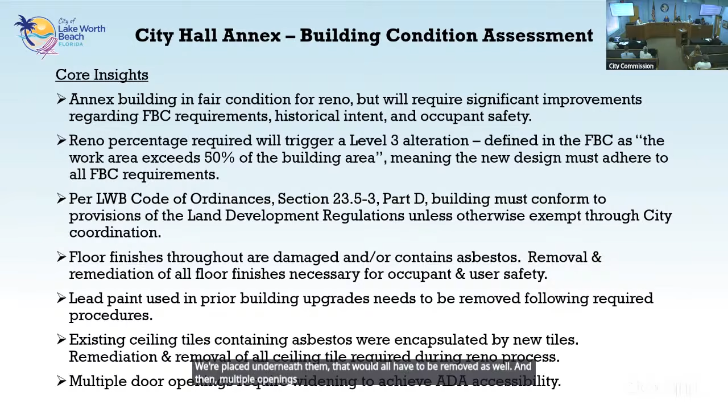And then multiple openings would have to be addressed as far as the width for ADA accessibility. The HVAC system units are kind of scattered throughout; we would need a single centralized HVAC system utilized. Restrooms need upgrades for current ADA compliance, meaning at least 2 of those would have to increase in size and square footage. Per the code, a small elevator or stair lift would be needed for ADA access to the 2nd floor, and that would have to be included with any kind of renovation. Depending on what type of future programming would be used, that would determine what type of fire separation would be required.

Can I ask you a quick question? When you say stair lift, do you mean the chair that goes up for someone in a wheelchair? To adhere to code, that's an option.

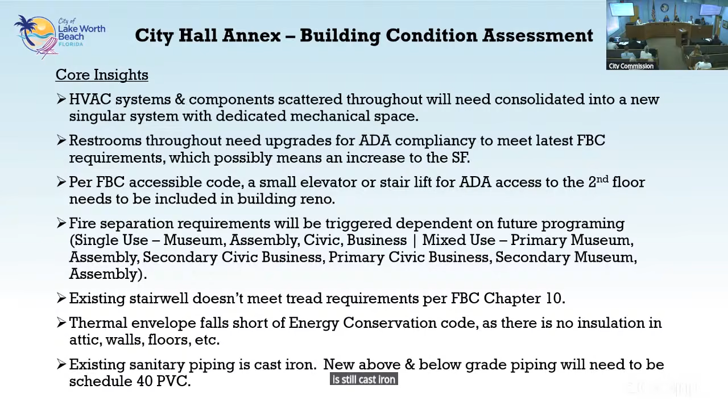The existing stairwell's tread requirements don't meet current Florida Building Code per Chapter 10. Our envelope has no insulation between anything, floors or walls, so obviously there's an issue with the thermal envelope. The existing sanitary system is still cast iron; that would all have to be updated to Schedule 40 PVC. And there's no fire protection noted, we don't have a sprinkler system, but as of a couple years ago we do have smoke alarms, added and monitored. So we do have that in the building, but no sprinkler system.

All of the distribution panels would need to be upgraded to 3-phase. There is currently no generator on site. The structural framing connection doesn't meet current wind loads per current Florida Building Code. The framing is under-designed and does not have capacity to resist the existing gravity and wind loads. Compliance with current code will require strengthening the foundation, floor framing, and the CMU wall. What we're currently doing is, you guys have already approved the roof trusses and the roof itself.

That is currently underway, and they'll get going with the actual roof truss work in the next 2 weeks. Once that's done, the roof work will immediately start after that. And that was based on the fact that no matter what the future of this facility is, we were going to have to address the roof regardless. So we want to at least get that done. And then this is basically to discuss what you guys feel could be a possibility moving forward.

I did want to have William address the zoning letter that was attached as well, so you guys can have an idea of what can and can't be done as part of this property. William Waters, Community Sustainability Director.

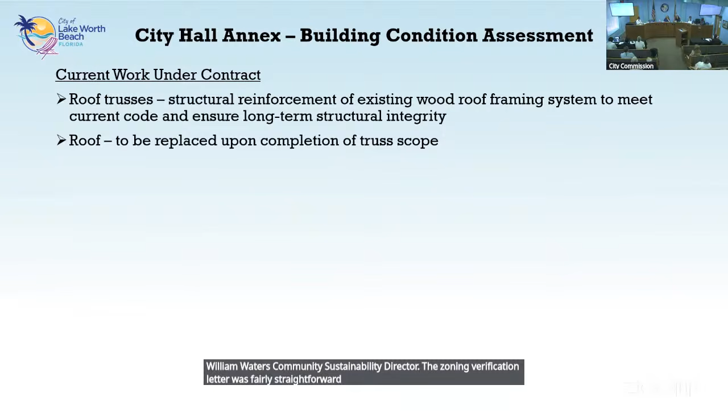The zoning verification letter was fairly straightforward. The future land use of the property is P. The current zoning is also P. The letter provided what the allowable uses are in the P district, which almost all of them are conditional land uses, which do have to go before the Historic Resource Preservation Board.

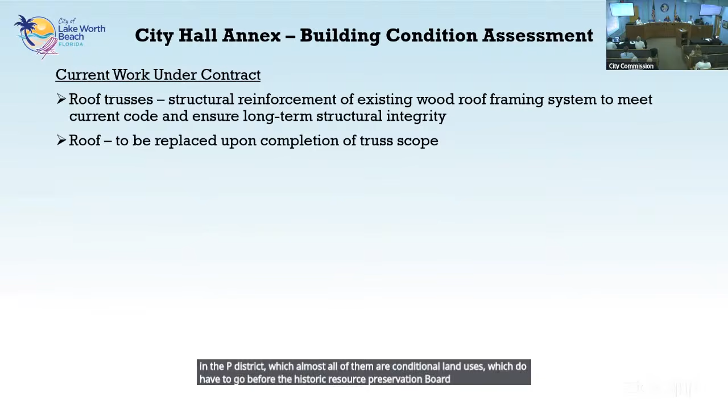The process to expand that list of permitted uses could take two paths. One is expanding the permitted uses in the P district itself, which would apply to all P properties, including the one we're in right now. Or it could be— Mr. Waters, Ms. May has her light on, as does Mr. Perry. Would you be a little slower, a little clearer? And when you say P for everybody, can you just explain what that means? Less acronyms, more fifth grade.

P means public. Thank you. And it's the same thing for future land use as well as the zoning district. And what does that mean though? Public. Well, that's public related. City hall is public, the library is public, the city hall annex is public. Most properties that are of a use other than public recreation, open space that the city owns and utilizes are designated as P. Okay, thank you.

So the two avenues to change uses or add additional uses would be: one, changing the permitted use table for the public district, which would apply to all properties that are zoned public, or possibly change the future land use and the zoning of the city hall annex to something like downtown, which has a whole wide variety of uses that would require probably a year-long process to change the future land use and then change the zoning to downtown. There is a significant difference in what is allowed in terms of building lot coverage, impermeable surface lot coverage, height, and those types of things between the public district and the downtown district.

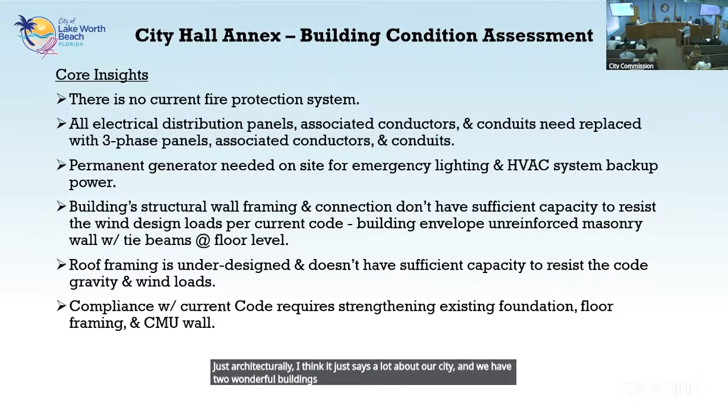Turn your mic on. Okay, Lori Whitkin, North Lakeside Drive. Okay, I find myself agreeing with the mayor on this. I've always loved that building. Just architecturally, I think it says a lot about our city, how we have two wonderful buildings at either end of our downtown, and I think it should stay a public place and be for our government.

The museum upstairs is just wonderful. I remember the museum when I came, and the one that was later created, what they did is magnificent. I think they've really captured a lot about our town, and I'm sorry it's not open even more hours. But I would really like to see that if we wanted people to come here. That's something, a museum, I think people would like to go to.

And architecturally, I just think we need to protect it. I think the city should do it. And I like the idea of having city offices in it. I used to like to go down there if I had to pay a utility bill, used to be able to get a parking decal without going crazy on your phone. So it'd be nice to bring that back. But I just think I'm sort of amazed at how much needs to be done.

It's 100 years old. Yeah, well, I guess it's time to do it all. But I mean, if we can afford it, I think we should find the money and do it, and keep it — all these offices, we shouldn't be paying rent for our departments someplace else if we own a building. That doesn't make sense financially. So if you look at what we don't have to pay to other landlords, I think we should keep it for our own.

And I don't think we should be renting it out for commercial purposes. I mean something like the Art League, to give them a space, that I can see. I think that would be a good idea, but it should be for those sorts of organizations and not for commercial purposes. Thank you very much. Thank you, Todd Townsend.

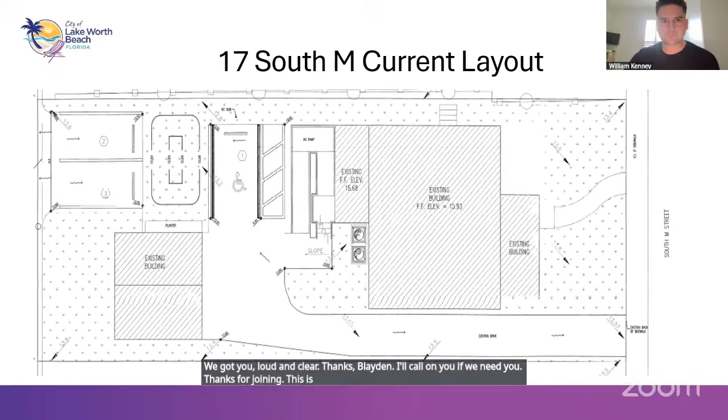They were a last minute addition to the backup. I do have one printed copy I can circulate. I'm sorry to interrupt, but can we get copies made, Mr. Perry, while he's going through this? Otherwise we're going to be lost. Can you go back to that slide?

Madam Mayor, before we get started, I want to say one thing: remember, this presentation is after the buildings move, and what we're going to do with it.

I had a couple questions, but okay, we've got some printed copies being made, should be here in the next few minutes. So I'll go ahead and continue on for the sake of time.

This is the current layout on the parcel where it is. There's actually two structures there. The garage doors face east currently — I want to point that out because in the new configuration, they'll be facing south. The larger structure is the hub for leisure services.

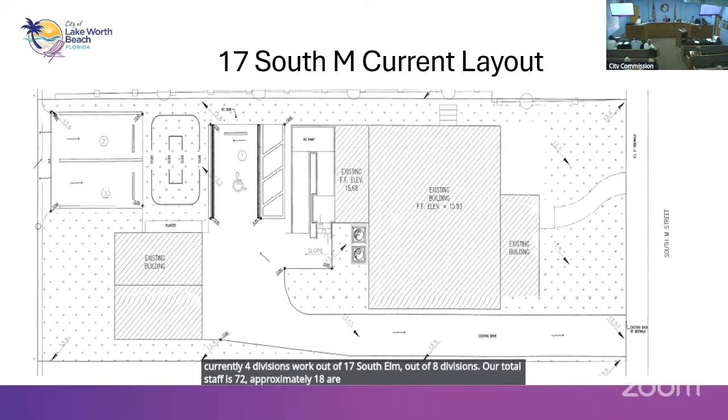Keep in mind when 501 housed parking, they were absorbed into 17 South M. So currently 4 divisions work out of 17 South M out of 8 divisions total. Our total staff is 72, approximately 18 are working out of that office.

The back side, the west side of the building, was modified for ADA so that if someone needed to come in, they would use the ramp in that parking space for the access aisle into that building.

Currently on the first floor there are 3 offices, a kitchen, and 1 bathroom. This is the main office that's the hub, the nucleus for parking. That large amount of staff, 10 right there, is pretty much the nucleus for parking.

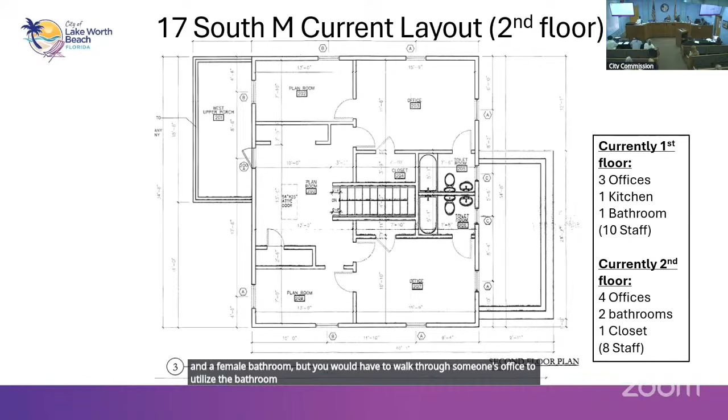The second floor has 4 offices and 2 bathrooms, a male and a female bathroom. But to use the bathroom, you would have to walk through someone's office. There's also a closet that was modified for staff to use as an office.

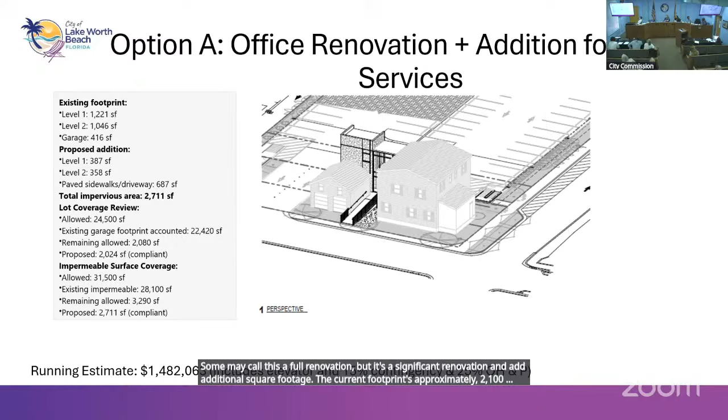Option A, some may call this a full renovation, but it's a significant renovation that adds some square footage. The current footprint is approximately 2,100 square feet, so this would add closer to 800 square feet of usable space.

The renderings here are from William Kinney, who's on virtually. He's got really 6 elements of design there. You can kind of see the price point. I know there's quite a sticker shock with 1.4 million — that's a full office renovation, and there are 6 areas addressed there.

We'll talk about meeting the intent or the letter of the law. So this would be more in line with the letter of the law. Any comments on that, William?

No, yeah, this would be a combination of letter and intent. Correct. William Kinney, anything? I heard you chime in. Oh no, I was just mentioning that. Could you speak up a little, sir? Oh, can you hear me? Okay, now better. Yeah, okay. Getting old. No, I was just mentioning that.

This is the full building renovation with added circulation from the first and second level by adding an elevator, and incorporating a full renovation for future staff with the existing conditions. So this is the full renovation, and we'll get into some of these renderings in the next couple slides.

This is First Avenue and K Street. K Street is to the far right, First Avenue to the left. The orientation of the building is how it sits now. However, the garage, which currently faces east, would be facing south for the roll-up doors. In the center of the renderings here, you can kind of see the ADA access.

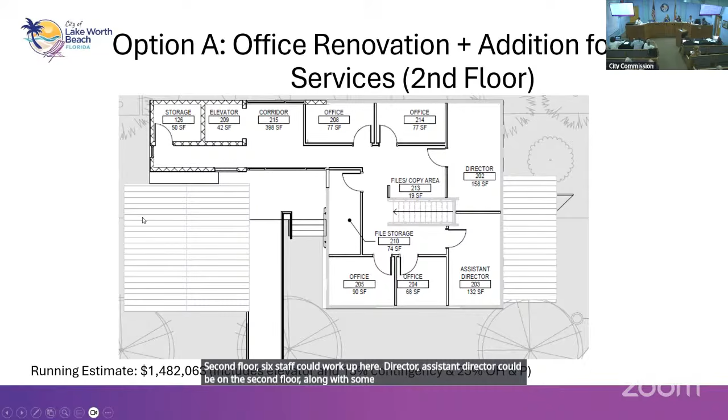So this first floor renovation would approximately allow 17 staff to work in there, but right now the current configuration allows about 10. The parking nucleus to that building would still be there, and then flex space for special events, PIO. Second floor, 6 staff could work up here. Director, assistant director could be on the second floor, along with some of the other managers from the 4 divisions that are currently housed in that footprint.

Option B is limited modifications, essentially the ADA ramp. Under option B, there are some modification options because currently most patrons of 17 M enter up the stairs off of South M Street. On this model here, with the limited renovations, we'd have to put it in between the 2 buildings, but could explore an option of it being off of K Street, for the ramp.

Now, both of these pricings include a 15% contingency, which is pretty much industry standard, and 25% for overhead and profit margin. So you can see the true price, or at least the running estimate of the probable cost, is approximately $120,031 for just the ramp and some basic site building elements.

William, anything on this? No, I have nothing to add for this slide. Ms. Malega has her light on.

Thank you, Stu. When I met with staff, and I believe William was there, and interim assistant city manager McKay was there, and Mr. Perry, my question was, if we don't choose option A, do we have space for our staff? And I was assured, yes, we do, because I know that you honed in on that on option A. So if we were to choose option B, which includes some staff, 10 employees, so it says for option B, the other employees do have a home to go to, from what I've been told. Is that still correct? Under option B?

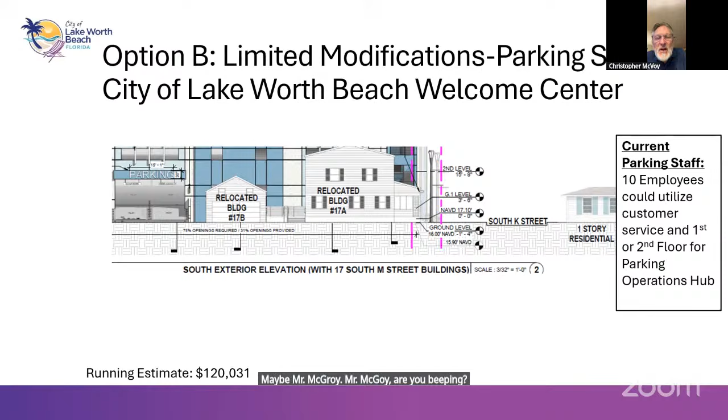Miss Malega has her light. Mr. Perry has his lighted. What's that? What was that beep? Maybe Mr. McVoy — no, are you beeping? No, no, I'm not. Oh, that was Miss Windage. I thought maybe he had a... Okay, just let us know he had. So... oh, all right.

Mr. Perry. Yes, Madam Mayor, just want to remind the commission of how we got to this point. As you recall, when we were going through our process, the Leisure Services Department met with the company and asked them to build out the worst case scenario — how much will we spend? And that's when they came up with the 1.4.

When we presented it and talked about it, we knew it was a lot of money, and we had other ideas, such as the utility director building a new building. We thought about maybe moving some of the staff out there. So there were some in-betweens. That's when staff said, we're just going to take a look at what it would take if we just moved the building and moved into it the way it is.

As we discussed the issue, certain elements came up and people said, hey, what about a welcome center? It was just thrown in as a concept, not by staff, but we said, you know what, that's a good idea, let's take a look at it. So when we brought this forward, we understand there might be additional costs, but we're not asking the commission to commit any dollars. What we're saying is, tell us the concept you would like to see. That's why we're here tonight — we're just asking, what concept would you like to see?

Well, and that's how the discussion came up. I appreciate that, but I think what concept we want to see is also, you know, what do I want to buy, how much do I have to spend — concept. So I'm trying to be a little more realistic.

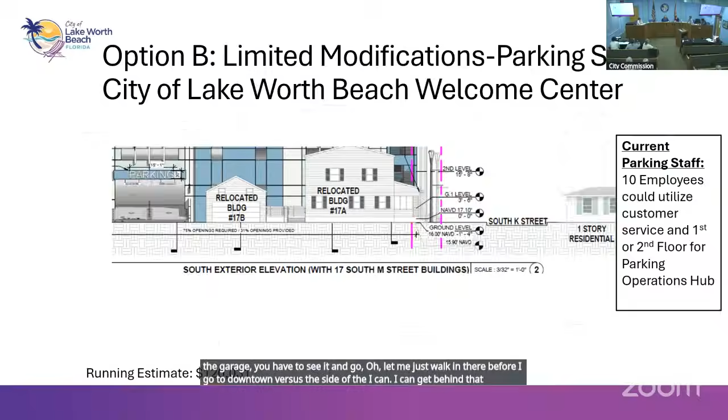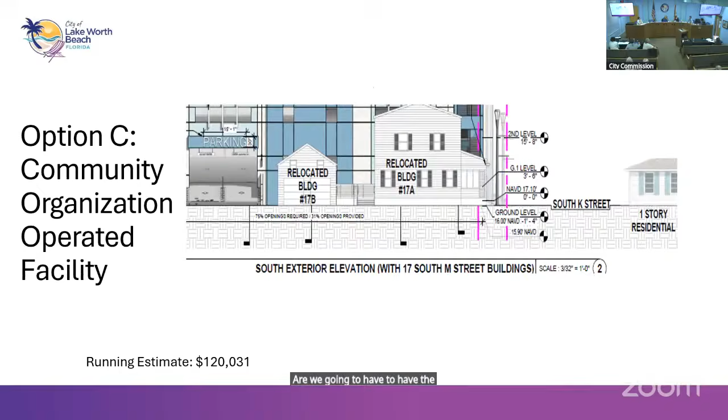Parking, I mean, people need to be able to pay their parking tickets, and it needs to be full service for them. Are we going to have the plexiglass windows, or is it going to be more of a desk experience?

The current layout was kind of in compliance with COVID protocols. Currently we have it because oftentimes folks come into the parking office with a hot temperature, so there is a physical barrier there between them and the customer service attendant. So it is recommended for that.

If we did the visitor center in the garage on the first floor, could we have room for maybe a PBSO duty office in there? A safety officer, or a park ranger.

I would like staff to come back with this, and I understand it's not going to be the $120,000. But I think if we're already doing it, it better be done right, because this is going to be one of the first buildings that anyone sees in our city.

I consent on all those things. You got my consent. Mr. McVoy, have you been listening, Mr. McVoy? I have indeed. I, to my knowledge, was not beeping.

It was something that occurred to me listening to a lot of the discussion of the visitor center, and people saying it sort of makes sense to put it at the garage, you park your car and you go to the visitor center.

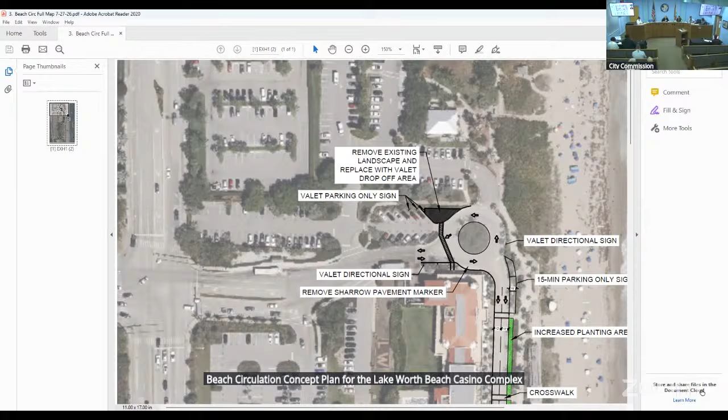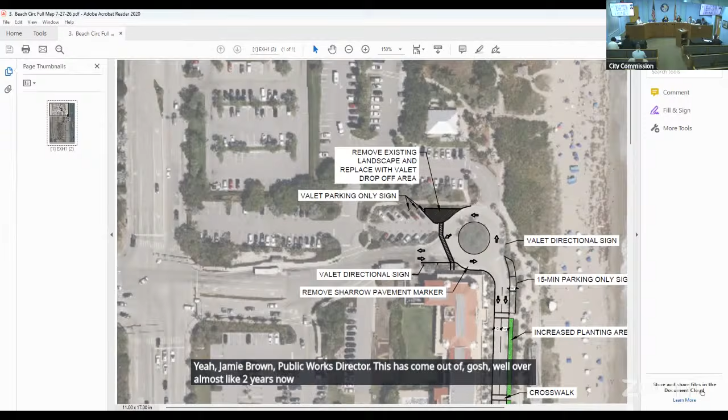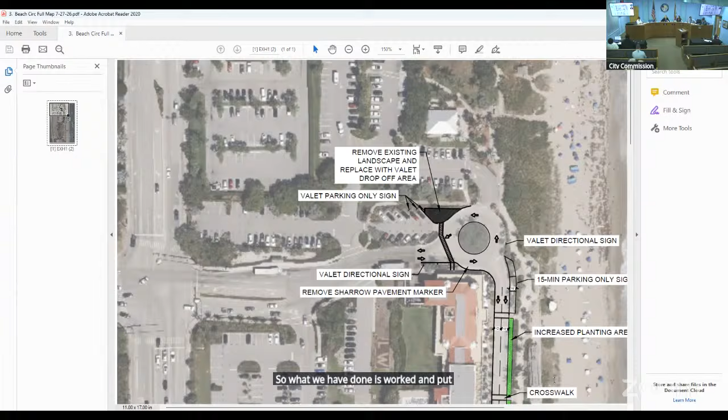I guess staff has a report for us. Jamie Brown, Public Works Director: this has come out of almost 2 years now of meetings with the tenants up at the beach and different things we've been dealing with nonstop. So we've worked and put together a concept for the beach to change the two-way traffic circulation to one-way southbound. I'll walk through the plan here.

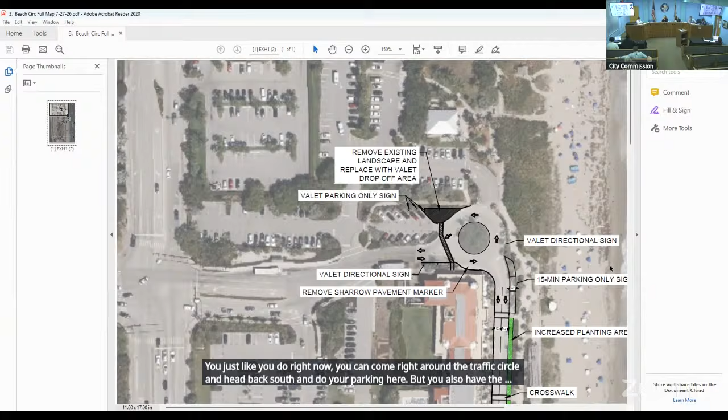So when you come across A1A heading eastbound, just like now, you can come around the traffic circle and head back south to do your parking here. But you also have the ability to go—you have 2 lanes heading south. This allows us to add an additional 11 parking spaces on the east side of these lanes: 3 at the north end of the casino and 3 at the south, the ones with the dark hatching here.

We looked at possibly doing temporary 15-minute parking, which would address some concerns up there—delivery services and things that weren't around when this was laid out well over 2 decades ago. So for people who want to do Uber Eats or grab a couple slices of pizza, instead of parking way down at the bottom and walking all the way up, this addresses that, and it also allows us to increase landscaping along this area.

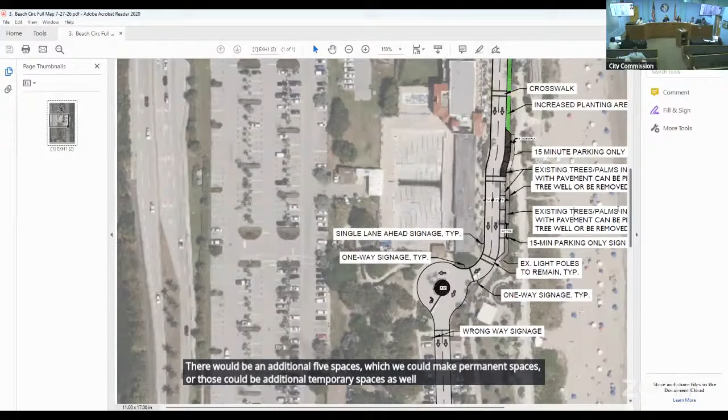And then, moving further south here, there would be an additional 5 spaces, which could be made permanent, or could be additional temporary spaces as well. Continuing on, we still have the roundabout there, and everything else is basically the same except for the traffic pattern. You'd have a merge and no entry, so no one would be able to come in from the south entrance of the casino building.

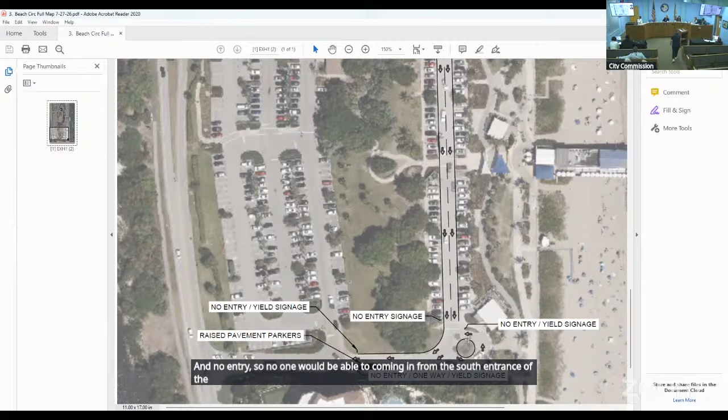You wouldn't be able to come right up this way, you'd have to go through the parking lot. But this also addresses some of the issues with fire safety. Stu and I were talking right before this—some of the events over the weekend up at the beach had a lot of stacking and issues, was it fire?

Come on up, man, you're right back there. What were some of the issues you were just telling me about from the weekend? Stuart Sword, Leisure Services Director: I observed yesterday at the Benny's Beach cleanup a significant amount of traffic in the far east lot, the top lot, the upper lot.

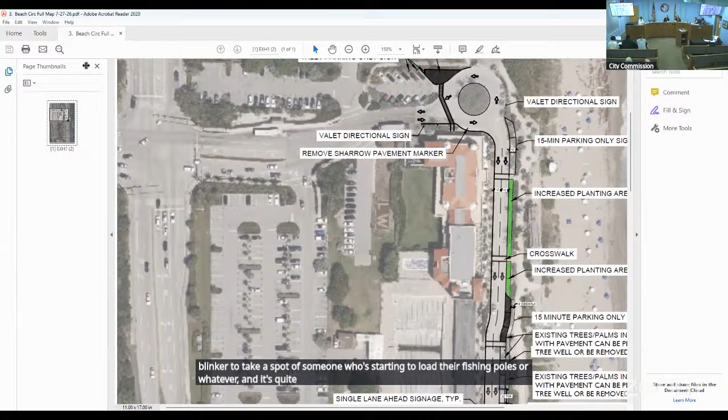What you'll see is folks will put on their blinker to take a spot of someone who's starting to load their fishing poles or whatever. And it's quite the production to unload the beach, so they're sitting there for 5 minutes, sometimes more, waiting to turn. So folks try to go around now counterflow into that lane, and it creates a bottleneck. Yesterday, fire rescue was circulating down there and had to blow their horn to clear out the bottleneck that's occurring because people are essentially blocking both lanes waiting for a spot to open up. So significant delays can occur up there during peak times.

So this is basically taking into account some of the stacking issues we're seeing, the traffic pattern issues we're seeing, fire rescue issues, tenant issues, and addressing some of their concerns that we've discussed in meetings with them, and just trying to modernize our traffic flow up there and modernize the beach to make for the best experience we possibly can.

But we wanted to bring this to all of you after having met with tenants and everything, to see what some potential ideas are, what you guys think of this, if you're in favor of something like this, if you would like to see something different, or if you don't like this at all. It's kind of a starting point to see where you want to go from here.

Have you spoken with police and fire about whether they're in agreement with this? Fire, yes. Police, we have not yet. So the fire department is okay with it.

Back when we spoke with them, again, this started a while ago - I believe Geraldine was still here back then, so it goes back quite a while. But again, with some of the issues we came up at the pre-agenda meeting, where you now have people parking illegally in the fire lane at the top there and trying to run across to get something real quick - that's a consistent issue that we deal with.

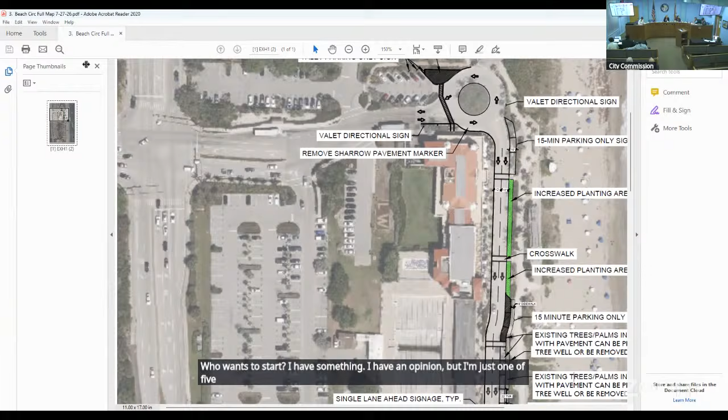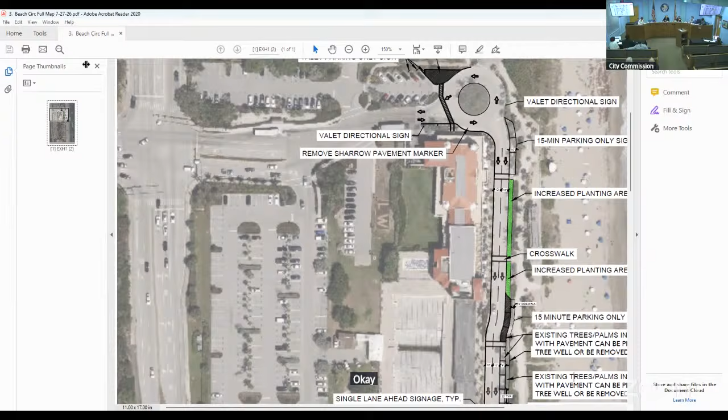Okay, I just have a question because you went over the 12 or 11 additional parking spots, but you didn't talk about the valet. Can you talk about that?

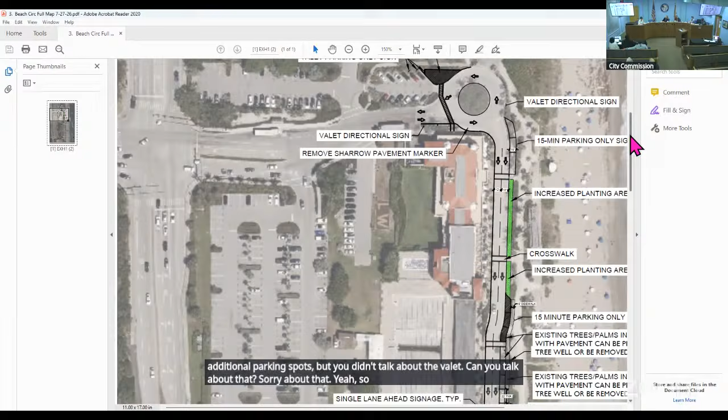I'm sorry about that. Yeah, so another one right here at the north end. That was one of the things that came up in speaking with some of the tenants. If we were going to address some of these issues up there, if this is something the city would be interested in doing in the future, it'd be something we would address right now, so at least we have the space for it.

Should that be something we want to do? Where you'd basically come up here, you would be able to stack at least one vehicle here in these first 2 spots. These resident parking spots would then shift to the bottom lot here.

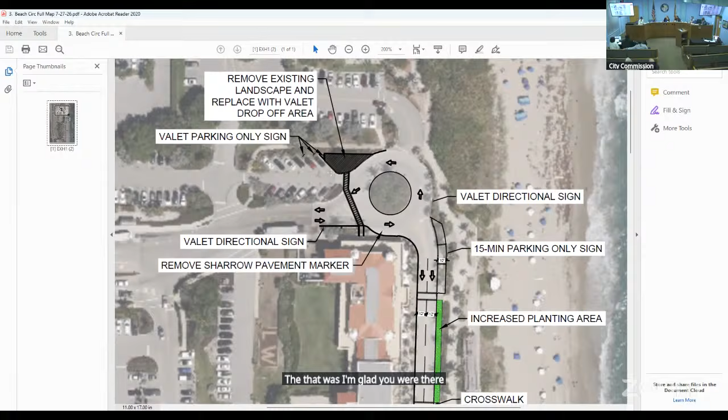Don't - that was, I'm glad you brought that up because that's my concern too. Taking away resident parking doesn't seem to be the direction that we're going in.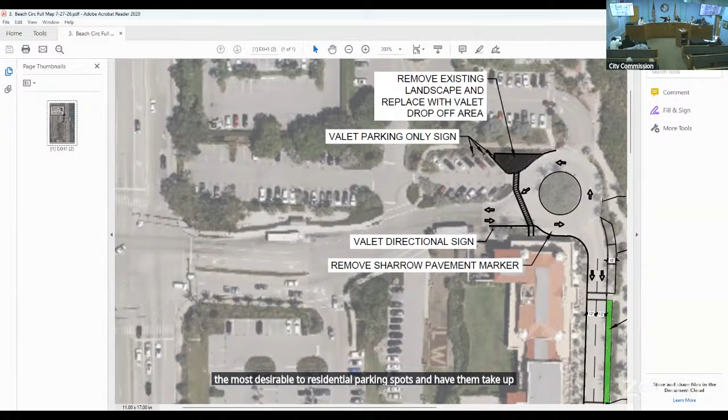Those 2 would just shift to the other resident parking spots we have down here. So you would make them the most desirable 2 residential parking spots and have them take up 2 of the 11 or 2 of the 13 spots you're talking about. Because the residential spots - that's the one thing about them - is they're convenient. There are some down on the lower level, but those are the premium spots. Let's not give them away to the valet. The valet parking would be in the bottom area down here. This would be 2 spots.

That's for the stacking, so that still takes away parking space. I understand, but there needs to be an area somewhere up here where someone can hand their keys off, and then they can take the vehicle and go park it in the spots designated for valet. Well, that's a very big concern.

My other question was about increased landscaping. I'm a little concerned because I go up there almost every day, and the sea grapes are so high now it's like going up to a wall. You don't see the ocean as much as you could. I don't know how much we can trim the sea grapes, but the thought of more vegetation - although I'm all pro-vegetation - are we going to block the view?

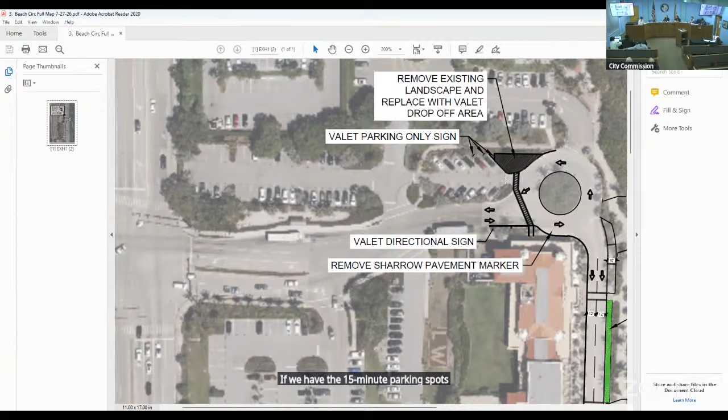One of the things is if we have the 15-minute parking spots, those of us who've been here a while used to just park and look at the ocean. It was here before, and this would allow us that again - now I have to illegally stay at the circle on top for 5 minutes if I want to rest.

So that would give people the opportunity to stop, either walk out or just look at the ocean. The preference would be, this would be one of those areas we would not recommend shade trees, but taller palms that would line the entire strip, nothing that would actually block the view from vehicles passing by, but that does give us that ability.

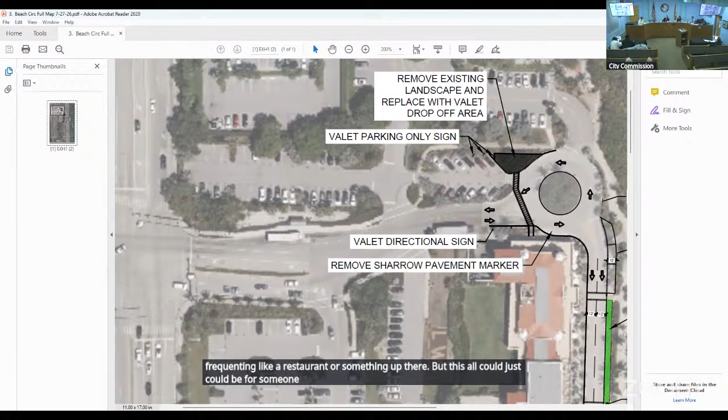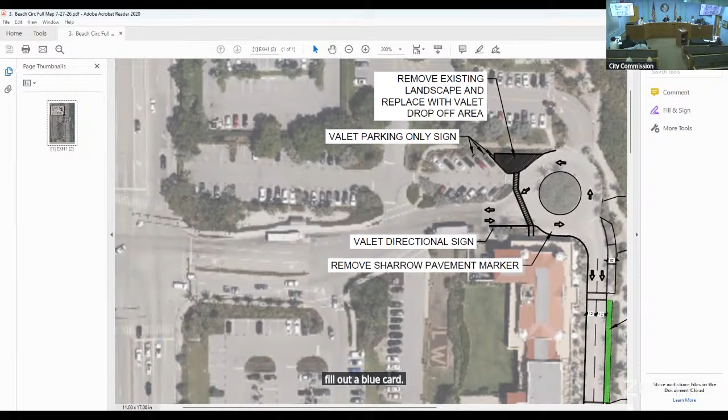As far as the valet, this wouldn't just be for someone frequenting a restaurant up there, but could also be for someone coming to the beach who doesn't want to deal with parking their car. They want to drive up, jump out with their cooler and chair, and fill out a blue card. Again, something that doesn't have to be done, but if we're going to address a lot of the concerns, valet parking is something we could look at.

Especially during turtle season, it's really dark for people to park at the bottom and walk up to the restaurants. I've had many comments from the owners up there saying it's hard. So again, just wanted to take into account everything we discussed with everyone and see if we could at least have an area for it.

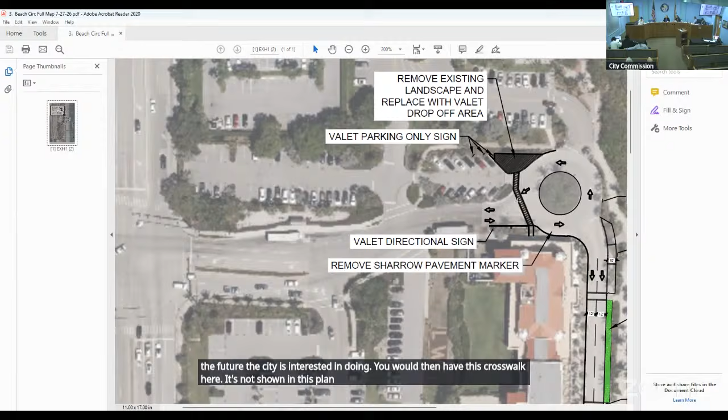If that's something the city is interested in doing in the future, you would then have this crosswalk here. It's not shown in this plan, but the thermoplastic striping triangle that separates the east and westbound lanes would actually be a raised median, so you'd have a pedestrian refuge there. There's a bad crossing there now, no pedestrian crossing up there at all, so we would have to address that as part of this overall plan.

I had one more comment. I noticed some comments saying we shouldn't do anything until we have this whole plan for the beach. Well, I want to be alive when we have a plan for the beach, but if I'm not, it doesn't matter - that will not affect the overall plan of the beach. The casino is there, the tenants are there, the ocean is there, the parking lot's there. That's not going to change. So that's my response to the idea that it's too early to do this. We could sit forever and do nothing.

Ms. Maliga - I was going to say to that point, Madam Mayor, there's been discussion of possibly doing a structure. This would not change the actual traffic flow or what we'd be looking to do here. We do have tenants who have been very loyal and up there for quite a while, and when they tell us things they'd like to see, it's nice to be able to address some of those at some point since they've been asking. I don't know the time frame for some of the things that may or may not happen up there, but we want to at least bring this forward so we can have the conversation and see where it goes.

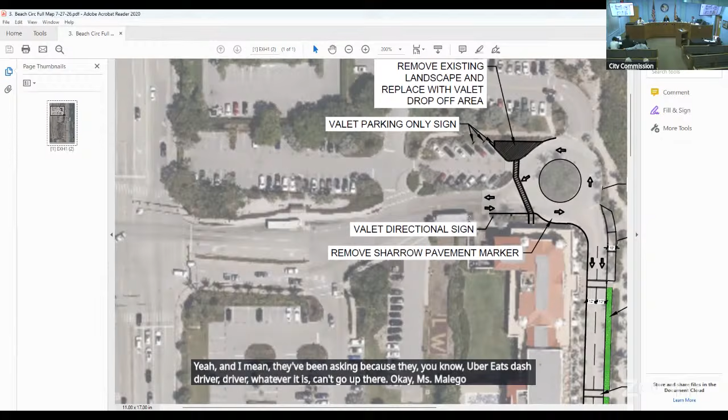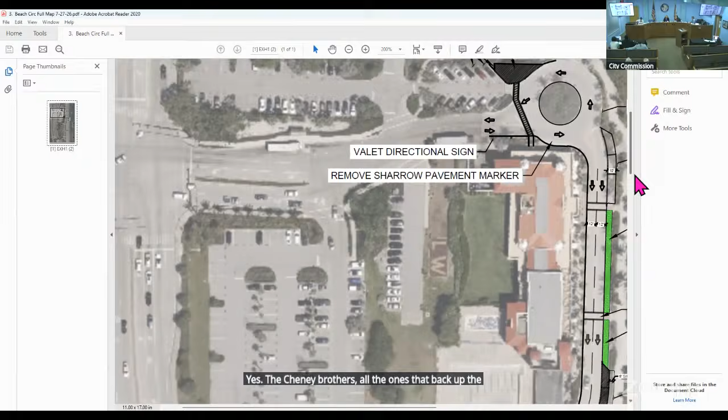They've been asking because Uber Eats, DoorDash, drivers, whatever it is, can't go up there. Where do the delivery trucks go? Can you go back to that? The Cheney Brothers trucks and others that back up the traffic - they park, I know where they park now.

This basically allows you a through lane. So when those vehicles are up there - some come early for deliveries before the beach gets crowded - but right now they basically block your northbound or southbound lane, and you end up sitting behind them waiting for traffic to clear so you can go around, but it still stacks up traffic behind them. This essentially gives you a through lane, so when that's happening you have the ability to go around them.

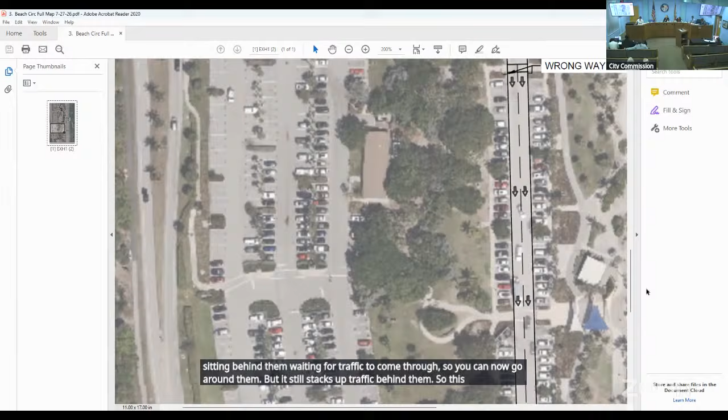Well, would it not be prudent for us to make a delivery designated area?

If we're going to be doing this, I'm one of the ones who's not in favor of doing this until we know what we're doing at the beach, because we just had 9 people tour the casino building and nobody gave us an offer to do anything because of the eyesore of the pool. So to me, I'm spending good money before I even know what bad money I have to spend to make this.

And the people have spoken. They don't want us to do a triple P. So yes, I agree we have to do something, especially for the tenants that are there. But I know the biggest concern is when the delivery trucks are there, and I think it would be prudent for us to make a designated delivery spot in between the main tenants, the main building, and Benny's.

I also would like to know if we're going to have valet, are we going to offer residents a discount? Because if we're having valet and residents choose to use it, there's not that many residential spots, even for those of us who have decals. I think if we're going to offer valet, it would be nice to give residents a discount if they're Lake Worth Beach local, if they choose to use valet. I know for ADA compliance, people schlepping 5 kids and all their stuff going to the beach for hours, valet is a great option.

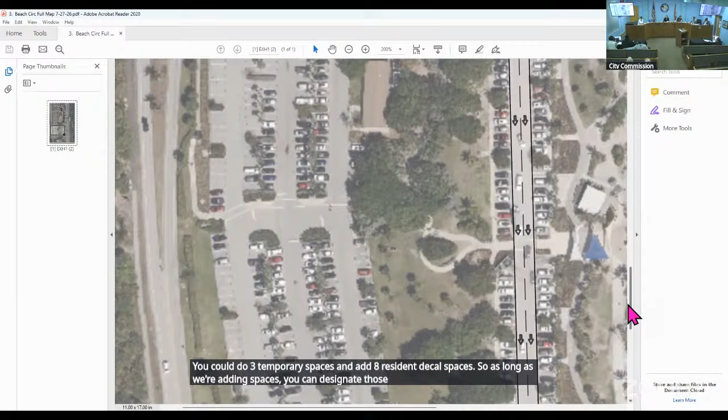Any space we add, though, we still are meeting that minimum requirement. So technically all 11 of these spaces could become - if we didn't want to do any temporary spaces at all, you could have 6 temporary spaces and add 5 more resident decal spaces at the top. You could do 3 temporary spaces and add 8 resident decal spaces. So as long as we're adding spaces, you can designate those as residential because we're still meeting our minimum requirement as far as what the county required for.

It needs to be open to everyone in the county, not just Lake Worth Beach. I appreciate that.

I just, like I said, I'm still concerned about the delivery trucks that are up there. Because if you have 1 or 2 at the same time, and then you've got the Uber Eats guy, I understand the congestion because I've been up there and I've seen people double, triple parked when they're not supposed to be, where it says no parking and people pull over and park anyway. I do believe the conversation has to be had. I just think we're putting the cart way before the horse right now. And we did run some models on different areas we could possibly do that.

What came back was basically the amount of time that you have delivery trucks up there. The benefit would be to have those be actual spaces rather than just for the temporary times the delivery truck is there, because they take up basically 3 spaces. And if it was one, but they were both one way, you could still get it to be less of a traffic jam. That was the way to address that without having a designated area.

Well, what about making a delivery truck little area, circle the delivery truck, which is where I usually see the parking people parked with their hazard lights on. Some of these trucks don't make the radius. Because when you're on the simulation, it's like a 14 vehicle - Cheney Brothers won't. Yeah, there's a certain vehicle you have to run through the simulation to make sure it makes the radius, and that does not work. Okay, so we did look at all that.

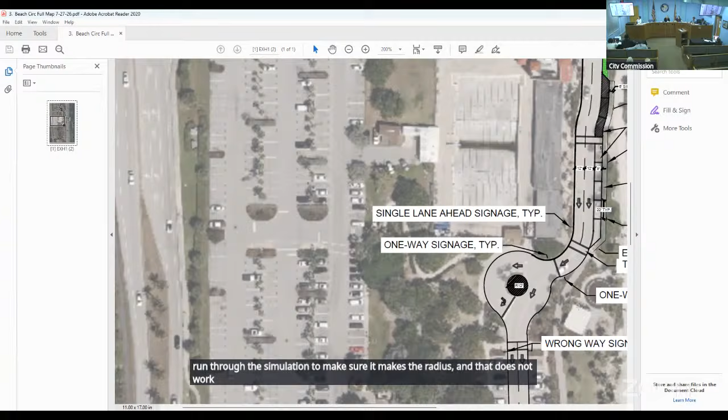Vice Mayor May: Thank you. I definitely am not for taking away any of the parking spaces up there for valet. I also agree with Commissioner Malega. I know you spent a lot of time on this and talked to the tenants, and I know there is a problem you are trying to solve. I get that, but I don't see this as the solution.

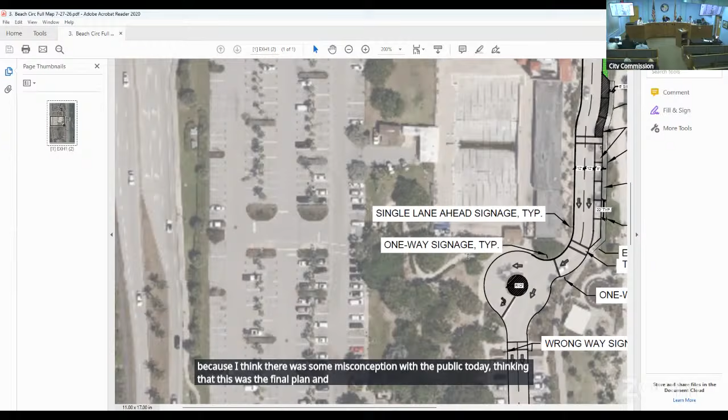I appreciate you saying that, because I think there was some misconception with the public today, thinking this was the final plan and the commission was trying to bamboozle them. I made sure I put 'concept' in the title, but which is not the case at all. I appreciate you clarifying that.

Absolutely, I think there's more conversations to be had. I don't think it's necessarily a bad idea. I do think we are going to have to do something regarding the Uber Eats type of thing. I think with the 11 spots, adding 15-minute parking in 11 spots, we can be more judicious with those spots. So I like the beginning, but I'm not sold on the final.

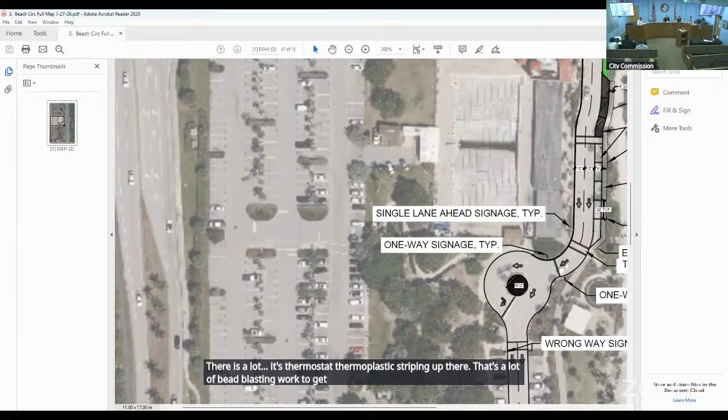Madam Mayor, if I could address the cost - there's a lot of thermoplastic striping up there. That's a lot of bead blasting work to get all that up before you put down new thermo. So you have to remove all the existing striping, that's tedious work. Then there's asphalt work, concrete work with all the new curbing, there's a landscaping portion. There's a lot to it. Do I think we can get it for well under that? Absolutely.

To be fair, I agree that if we're going to do it, we've got to do it right, with the thermal blast or whatever. But I've also driven down South First Avenue, and we can't even drive down that street. So we have drivable streets working great up there, and we have others where you may literally lose part of your car driving down. So it's not my priority, that's all I'm saying.

I'm like, get a bucket of paint and change the arrows. Oh, let's go to the high school kids. Right, get the high school kids.

Mr. Segridge, did we pay WGI for consulting on this, or did we just reuse their maps? A very minimal amount, because this was not an actual design plan, just basically utilizing existing survey work. Okay, so we did pay for some consulting? Yeah, we met them out on site to look at some different things.

And just for clarity for the public, how long have you been working on this? Like the concept, has it been around 3 years, 4 years, 2 years? It's about 2 years, but obviously we weren't working on that the whole time. We'd meet, come up with an idea, meet with tenants, then 5-6 months later meet again. It's not something that's been pressing because there's a lot of other stuff going on. But we finally got to a point now, so there hasn't been an extreme amount of staff time put into this.

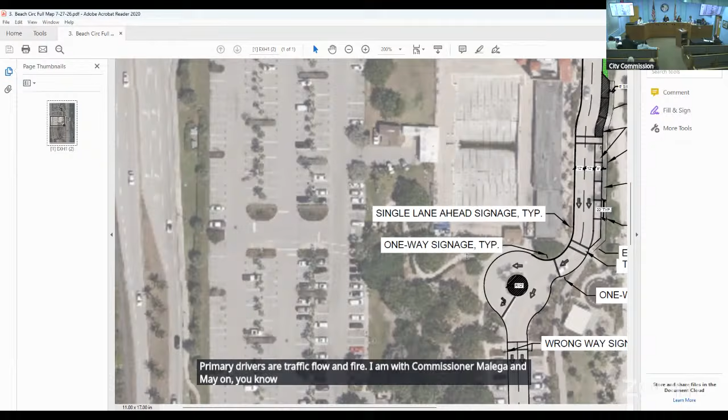There is so much wrong with what's going on at the beach that needs to be corrected. Looking at the overview here, pretty much 50% of that land is this big, dark gray, useless structure with our wonderful LW piece of wood chips sign that I hate.

Already been discussed. It's been addressed.

So I understand the delivery truck issue, that kind of makes perfect sense, right? If we have two different one-ways, there's a lot of traffic. I try to avoid going up to the top of that just because when you're driving through, people are trying to back into spaces and things like that. It's a mess. I just don't like dealing with it. This would alleviate a lot of that.

I wouldn't necessarily be opposed to just looking at purely changing the traffic pattern, doing nothing else other than saying instead of it being two one-ways, it would be unidirectional. And what's the minimum that we have to do to accomplish that?

I think addressing the Uber Eats issues and so on, there's a very select number of tenants, about one, where Uber Eats is probably an issue, or DoorDash and all of that. That's the pizza parlor. They do a lot of business, we order from them all the time.

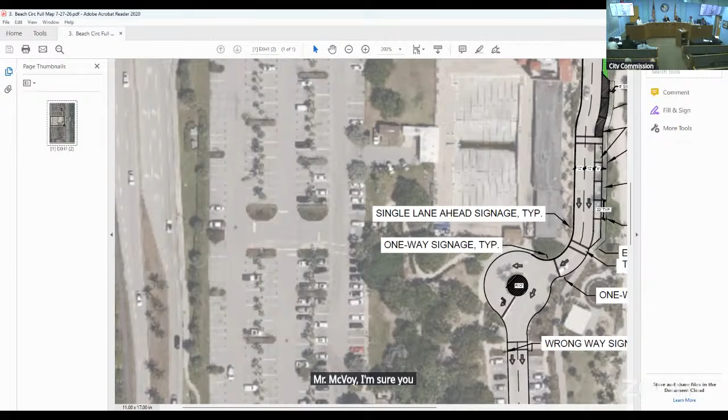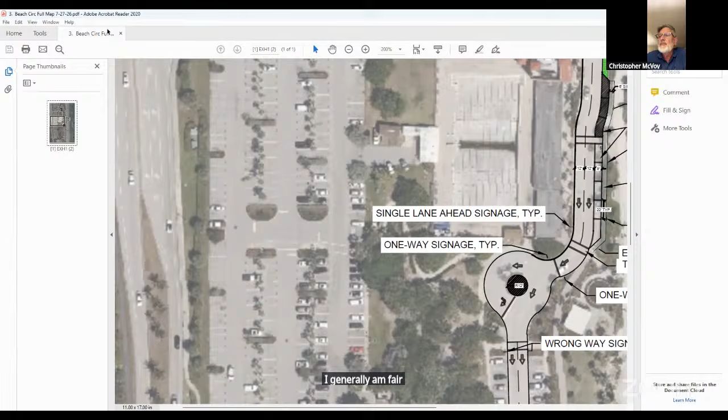Well, thank you. I generally am fairly similarly aligned to some of the other concerns that it doesn't seem like this is our biggest priority, either citywide or beachwide, if that's a term.

The concept of making it unidirectional southbound doesn't seem unreasonable to me. I'm not sure it would cure the problem discussed early on of people waiting for somebody to unload and get in and out of a parking space. Maybe it would help with that. Won't make it any worse, and it might accommodate the delivery trucks. So the unidirectional, I could go along with.

I don't know that I see it as the biggest priority. I do understand you can't just paint when you've got to do directional painting. It's special paint and it's on really tight so it doesn't come off, which means when you want to take it off, it's not so easy.

And I don't have any problem, although I thought Geraldine did a very good job. I also think Mr. Spiegerhalter does a very good job. So sure, check in with him. I don't see any problem with that.

But if I was thinking of priorities, we've all expressed some interest in trying to do something with the northernmost space on the second floor. Maybe to people's surprise, I've always been a supporter of that being such a unique space. I have no problem with it being an expensive, fancy restaurant that probably most of us wouldn't be able to afford most of the time, but maybe would once in a while. But everything I've heard for decades is that nobody was very interested in biting on that because there were some structural things at the north end of the building and maybe some kitchen things. Some of it was where dumpsters were. Some of it is kind of matching aesthetic level access to the second floor that doesn't go by dumpsters, that would be accessible for folks looking for that kind of experience.